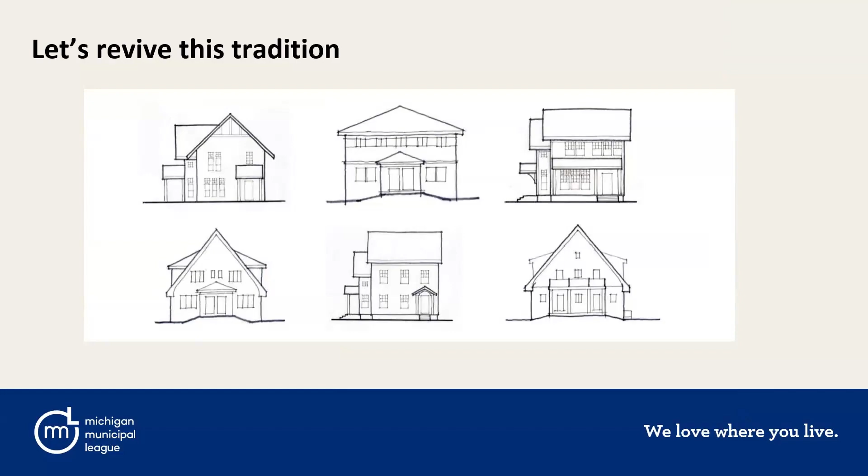Let me stop for a second here. Shahan, are there questions before I move into talking about the plans? I think there are a few, we can probably hold them until the end. Okay, great.

So at this juncture, we were able to receive funding from the Michigan Economic Development Corporation. Thanks, guys. And we brought in a pair of architects that we knew from the MHPN community. In fact, Dan Bullman had already begun noodling on some smaller scale single family housing that was inspired by catalogs. I didn't know that until I had a conversation with him at an MHPN event.

I'm like, hey, we should talk. So he and his business partner, Amanda Harrell Seaburn of East Arbor Architecture, that's their firm, came in to work with us on developing a pattern book homes guide that offers one of the solutions we'll need for addressing the housing need for small scale housing.

Each of these home plans were thoughtfully designed to ensure that they utilize key components that allow them to be visually and functionally compatible with the common housing types found throughout Michigan.

Key design features include separate HVAC systems, so easier to separate metering for not only HVAC, but also for electricity and for gas, or if they so choose, all of those different things separated out. Individual washer and dryers and units.

I can tell you, having been a young mother without a washer dryer in my home, this would have been amazing. Let's make it better for the people coming behind us. There's also sound buffering and the dignity of private entrances.

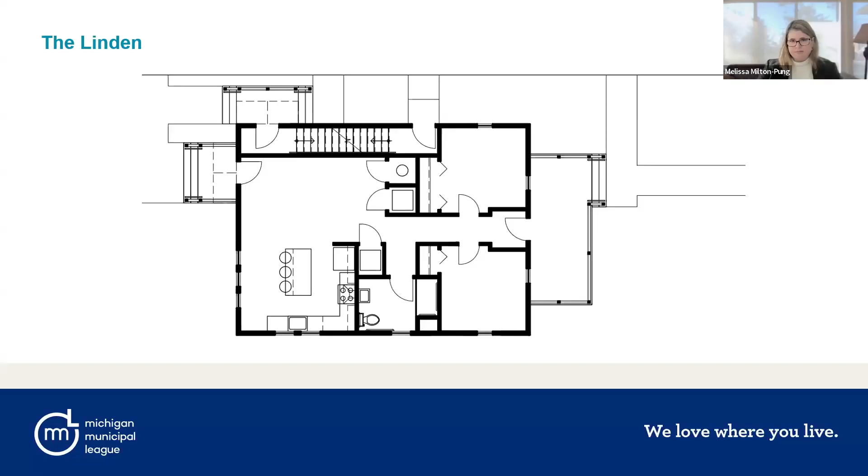And all of this could be done without requiring any changes to the rest of the floor plan. We also provided flexibility in design—these are both the same house, they just have different skin. For floor plan 1, you have this neo-Tudor revival. Floor plan 2, you have a bid towards the four-square tradition you see here in Michigan. So check it out: simply remove that faux rake—I learned the term faux rake—replace the gable roof with hips, and you get this: a completely different exterior, same floor plan. Isn't that cool?

So it's all about flexibility. You can also see that we gave recommendations for different exterior treatments: cedar shake, horizontal hardy board, stucco. We wanted to incorporate these designs to be as flexible as possible.

So we thought about it in terms of a theoretical lot, because this can be placed in a lot of different places. Our theoretical lot was 50 feet by 100 foot, and this is based on a longstanding friendship with the city of Kalamazoo that has done a lot of this great work. They've also worked with the city of South Bend, Indiana, helping us figure out an average size lot in an urban area, fitting it on there, and how you'd see it with different site conditions—side-loaded driveway, front-loaded, or alley access. We thought about how people could see the different scenarios. We also tried to illustrate it, because if you're a literal person and you're talking about something theoretical, you need to see the images—you need to think about how you can react to it so that you can feel right about it.

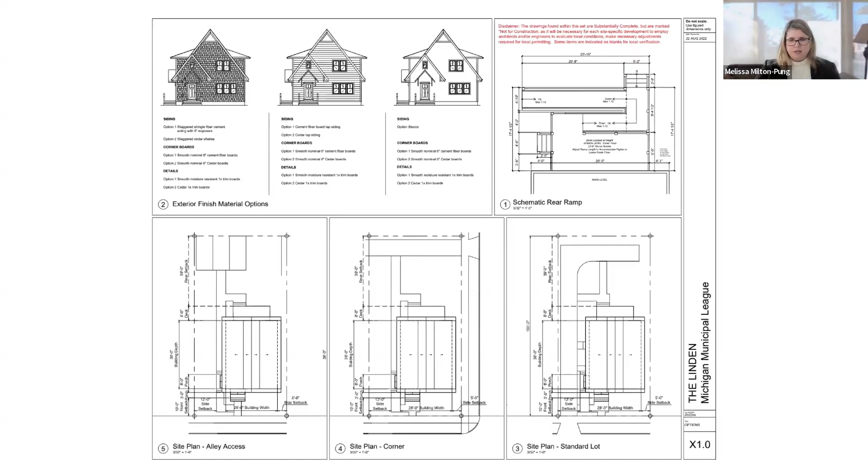There's 1 barrier-free unit located on the main level, you can see that ramp there. The focus is on how the fourplex fronts the street with contextual sensitivity so that it blends in with single-family homes it will reside along next to. There are 2 entrances, in the front and the side, one to the street access and one to the side to the ramp.

This is critical regionalism, guys. You definitely think that this will fit into Michigan. It doesn't look like it's trying to be on the Cape Cod or in Palm Springs. It looks like the Midwest.

Here's some of the images that we had colorized. Maybe you want to go dark, maybe you want to go blue, I don't know. But you know what, we don't need to regulate paint color. We need to think about how are we building durable things that people can continue to use over time.

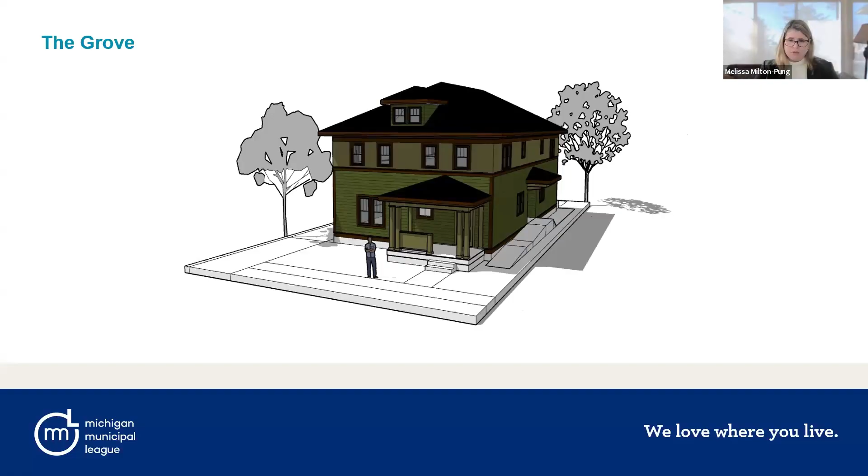Here's that floor plan, it's very symmetrical. Again, 2 bedrooms per unit, barrier-free bathroom, in-unit washer dryer. Yay!

The ductwork is completely separated. And what we learned in the Grove, because we went beyond 3 units to 4, this one has to be sprinkled for fire safety. So it helped us learn a valuable lesson about how big do you want to go, and how with missing middle housing, oftentimes you can do duplexes or triplexes, and then you don't have to have the cost of doing fire suppression.

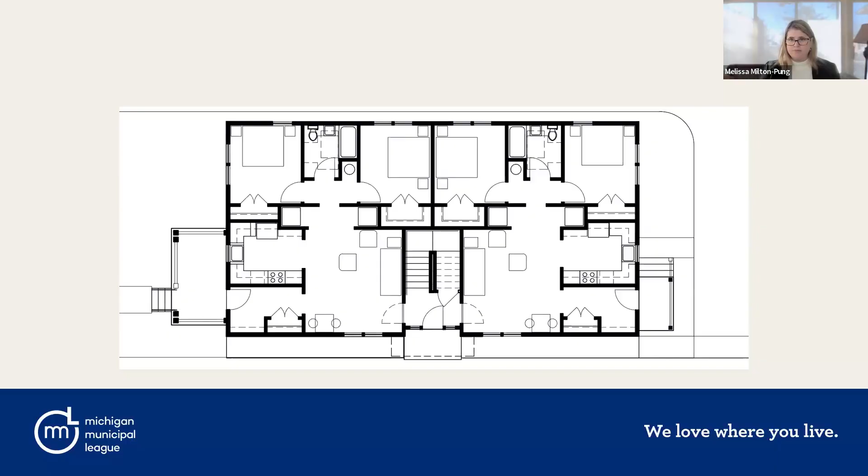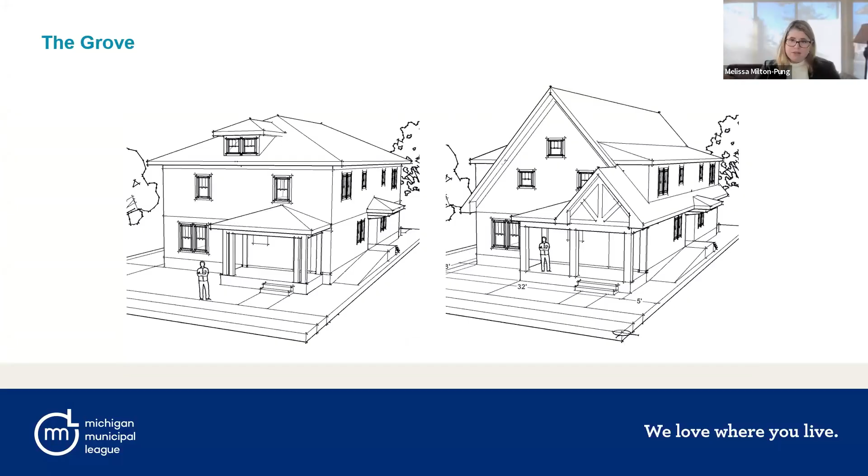Here's the 2 versions of the Grove. People tend to like the 4-square face on the left, but you can also do something that looks like a Tudor revival on the right. Yep, these are the same house, different faces.

At this point is usually when I have our architects talking and they love to dive into more of the details. If you're an architect in the room, ask questions, and if I don't have an answer for you, I'll get you over to Dan and Amanda.

Our focus was how to develop designs that can be built anywhere in Michigan despite variability of site conditions, snow loads, wind loads, and soils. So with unknown site variability of setbacks and lot size, etc., we decided to develop designs that were implementable on a large scale by leaving out a few details.

So that's where we invented the term 95% complete. Is this an interesting industry term? Heck no. But we're trying to communicate to people that they're almost done. And if you work with your local building official, you work with your general contractor, you should be able to build these without too much trouble. It's saving you thousands and thousands and thousands of dollars of architectural work. And we were able to structure an agreement with East Arbor so that they understood that their work would be open sourced like this, and they felt confident that this was an important thing for them to do.

Another term that we use is substantially complete.

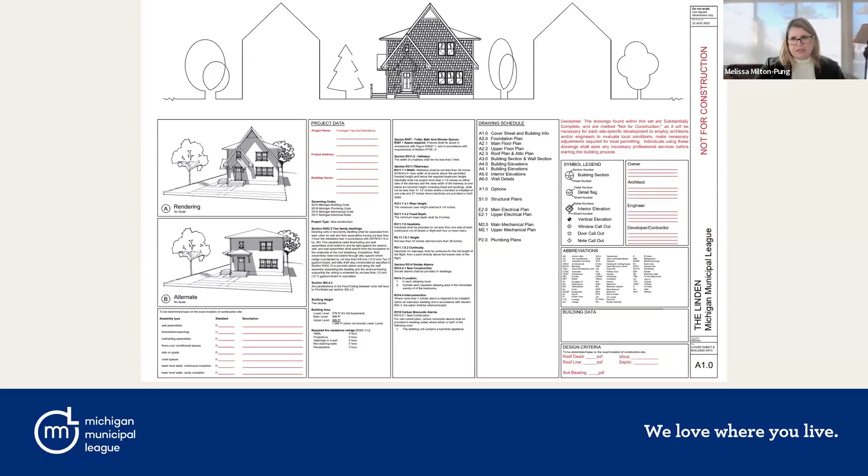So here's another one for the Linden. And all of these are on our website. Xiaohan put that into the chat at the beginning. You can just click through and pull them down.

I will note for you that there is currently a court case that's held up right now about the upgrade in Michigan building code. But when we do see that upgrade to 2021 standards, there's a naming problem there, it would be the most current standards. We will be updating these plans to make sure that they are also in compliance with new standards.

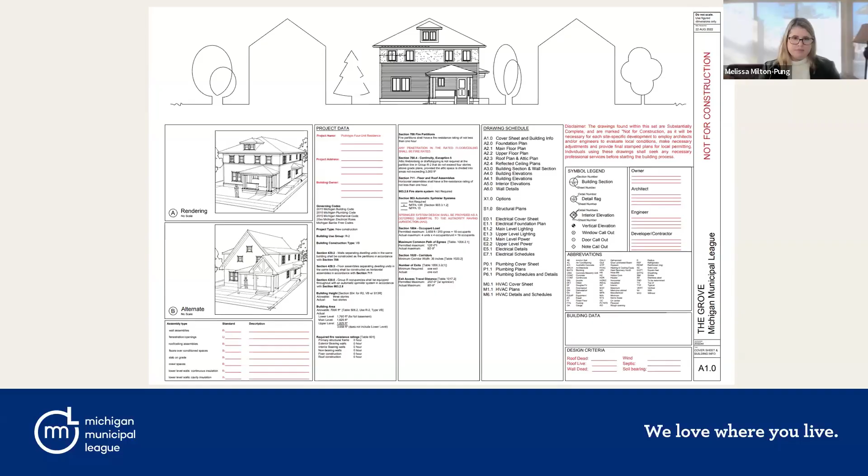Here's a few screenshots for the zoning reform toolkit to help you figure out how do you do what's known as a zoning stress test. What if you were to look at the existing zoning in a community and ask yourself, if I were to build this house, would I be able to meet the requirements for setbacks from the lot line? Would I be able to meet the requirements for height or for the size of the building? In many communities, they have a minimum square footage for unit size, you can't build anything smaller than 800 square feet in many places, which is kind of a challenge when you think about some of the smaller stuff that we came out with in volume 2.

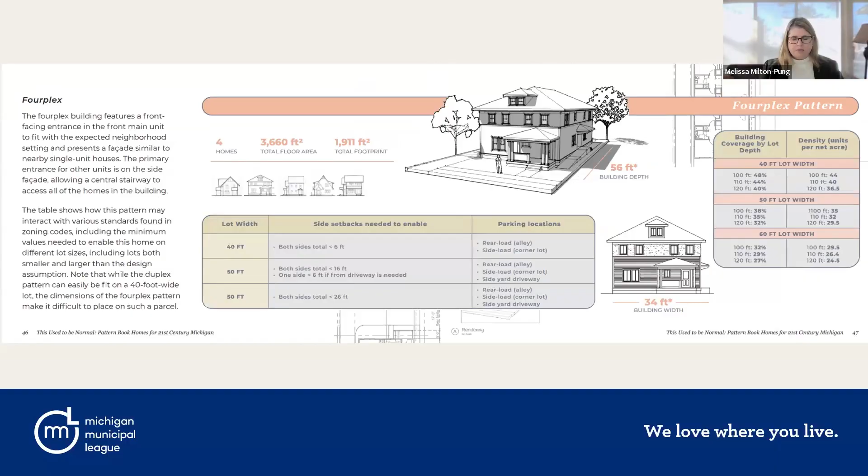Here's another view of the fourplex, our Grove, in volume 1. And here's a few more sketches.

Here's what we came up with in volume 2. We called it the modular mixtape of options—so many different configurations. The one in the lower left is an ADU that's the same cottage put on top of a garage as the pink one in the upper right. Same floor plan; we turned its orientation and dropped it onto the ground.

Those can be configured in what's known as a cottage court. Who here was a fan of The Big Lebowski? Yeah, that's where the Dude lived—in a cottage court, smaller houses all around. He also knew his neighbors, didn't he?

The row homes we see at the bottom right can also be reconfigured into triples, all kinds of different ways. And then the upper left version is actually still a duplex, meant to be more of an alley house to put into the back of a lot to squeeze in two new units.

These are also copyright-free plans. So we have a total of 6 units, 6 housing plan sets that you can use, counting the Abbott A and B, the pink and the teal, as one with different options.

We also turned our attention to U.S. Green Building Standards to increase energy efficiency. We talked about the use of structurally insulated panels, SIPs, to increase the speed of construction and reduce the cost of labor. And we also dived a little bit into financing case studies.

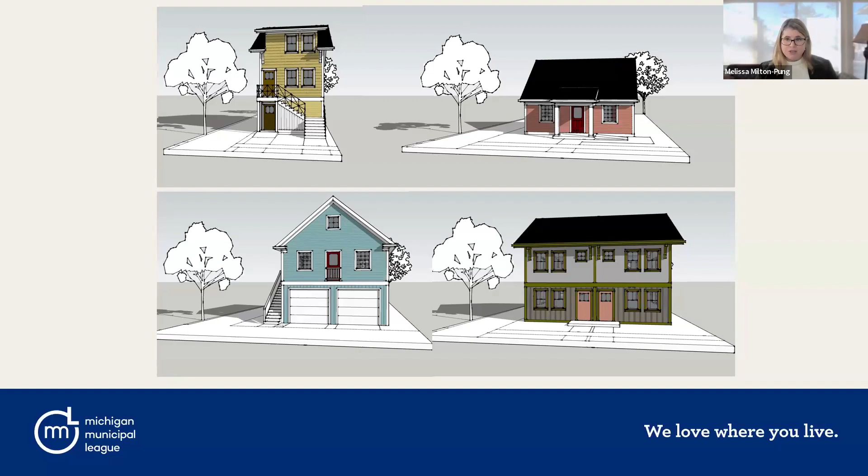Fun fact, did you know that you could finance up to 4 units with 1 HUD loan? Now you do—as long as you live at the site, you can do that.

So here's what we were able to create, and here is a mock-up of how it would fit right next to existing housing for scale.

Now is the time to flip the cassette to the B side of our housing mixtape. Press play, crank it up—let's rock out to those new housing classics.

I've got a little video to show you, and I hope it'll work. Here we go—this is a fly-in to an actual block in East Lansing, right near East Arbor Architects Studio, and it helps us imagine where this housing would fit in.

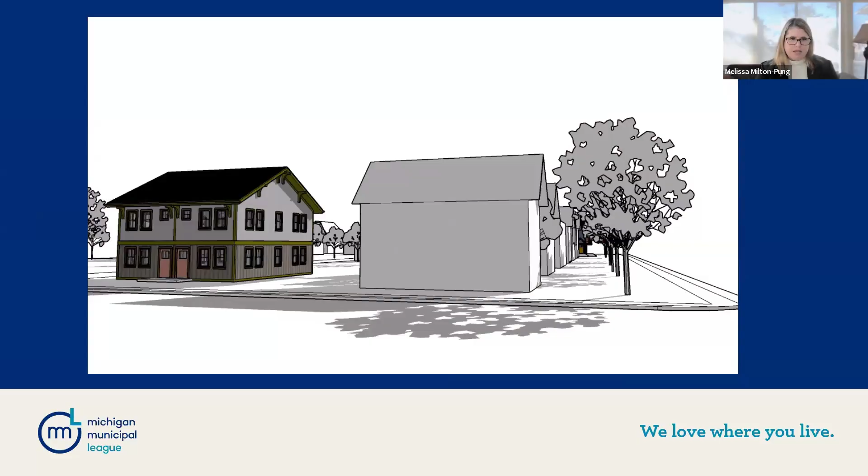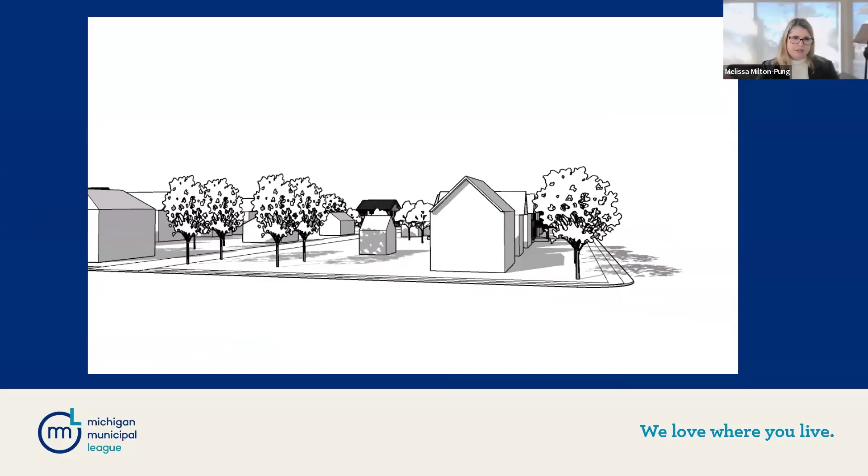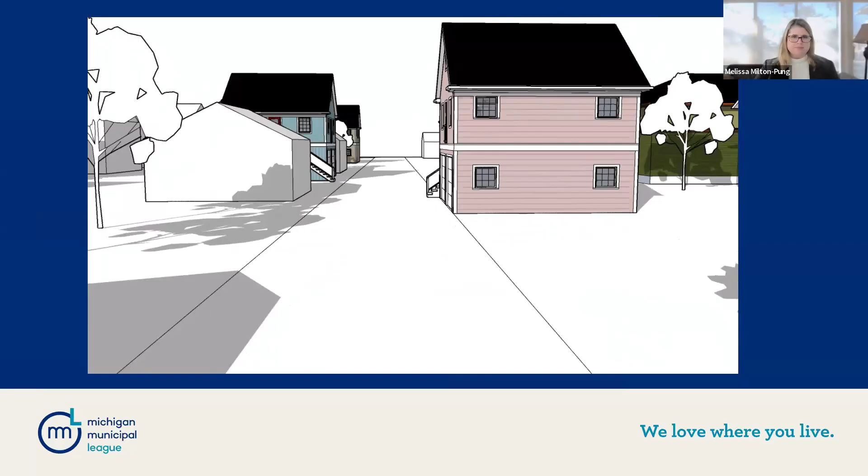That's a little cottage court there, there's the Grove on the left, and here come some alley houses as well. Now we're going to see somebody's garage apartment. It's not so scary, is it? Gently adding into existing neighborhoods we already like.

So what if I told you it's not just red pill or blue pill, but there are a lot of different options. One way is to figure out how to pre-review the plans with your municipality to say, here, we like these—you guys can choose what you want to build, and we're going to work with you to fast track it.

That's some of the conversations we've been having with several different communities across the state, because we know implementation is not easy. The point is to reduce the weird factor and show people the why, the need, and the how. And if we can reduce the wait time or slowness that could happen with the municipality facing new construction like this, all the better.

We're actively working with several places across the state. Our goal is not necessarily to get these exact houses built, although I would be thrilled if someone did do that, because I don't have the resources to build a new house myself right now.

But it is to help communities embrace the normalcy of new infill and multifamily housing, and how looking at our historic precedent will help us make good decisions about our future history.

So what you can do next is understand that we are fashioning a new set of rules. The League has released a program proposal called the My Home program, where we are helping support local control as a foundation issue, allowing cities to decide their own destiny instead of being told at the state level what they need to do.